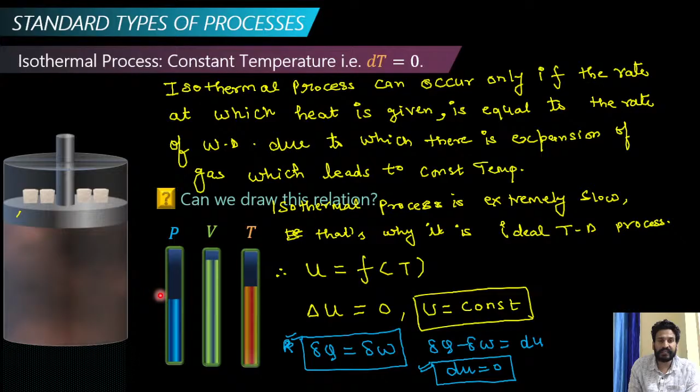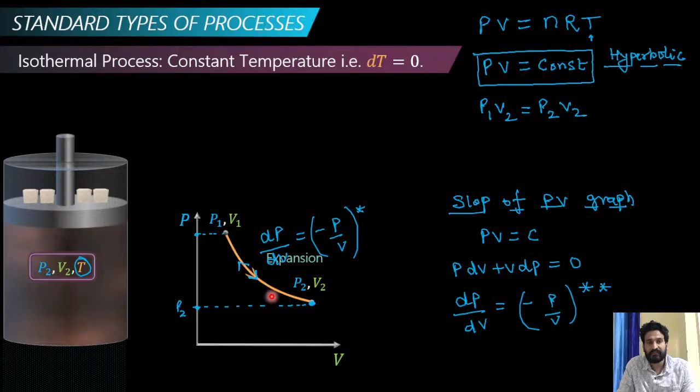So this is what we already discussed, right? After that, we discussed about the slope of the PV diagram. First, we discussed the PV diagram, where P is decreasing and V is increasing. So we discussed what kind of diagram we can expect from this process - a kind of hyperbolic graph we can expect, right? And after that, the very important slope of the PV graph - questions are directly asked on this slope.

So very simple, if you are able to remember this formula, well and good: minus P by V. Otherwise, you know the PV relation for the isothermal process, that is PV is equal to constant, and from that equation you can derive dP by dV by differentiating the whole equation, right? There is no issue. So this is important: PV is equal to constant, or for any two processes we can write P1V1 is equal to P2V2, right? It is P1V1, please correct it - in a hurry we wrote it wrong. It is P1V1 is equal to P2V2, like this. The product of P and V will be the constant.

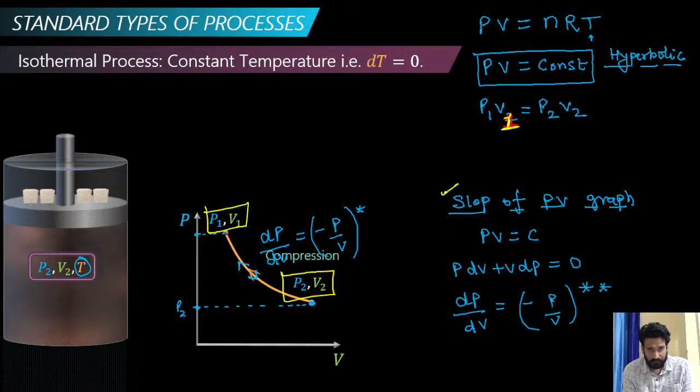Good evening Anushka. So we have discussed the slope of the PV graph. After that we discussed about the work done in the isothermal process. So work done, we derived that W is equal to nRT ln(V2/V1). Good evening Mohammed. So work done, we derived nRT ln(V2/V1), or we can replace this nRT with P1V1, right? P1V1. So it's P1V1 ln(V2/V1).

Please pay attention to my words, what I'm saying, right? Everything we cannot write in the notes - there are certain things which need to be remembered. So here this is the initial condition. If I know the initial condition, or you can say the initial parameters of pressure and volume, and after that if we know the final volume, then we can use this formula to find out the work done for the isothermal process.

If we don't have the value of the pressures, then use this formula. In both the formulas, the volume information should be required. If only temperature is given to you, then use this formula, and if the initial pressure and volume information is given to you, use this formula. If instead of volume, the information is in pressure terms, then use this formula.

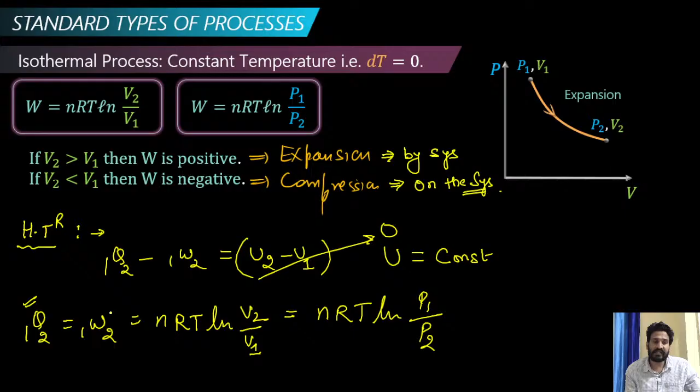If we talk about heat transfer, as we know that the internal energy is not going to change, so these both the terms are equal. So mathematically the heat transfer and work done for the isothermal process is the same. Only by mathematics, not by meaning.

If I plot the PT graph, then this kind of graph I will get, because temperature is going to remain constant throughout the process. In the VT process also, the temperature is going to remain constant throughout the process, right? So this is my PV graph and I am explaining the expansion process. In the expansion process, as you can see with the help of this arrow, pressure is going to decrease. In expansion, volume is going to increase, so here you can see the volume is going to increase and my temperature will be constant throughout the process.

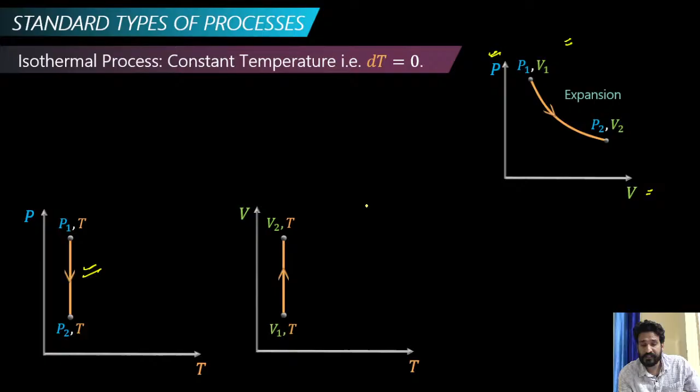I hope that up till this point you have no problem and you are basically done with this. Please give me confirmation. After that I'll start the next part, that is the comparison between the isothermal and adiabatic process. Directly a question is asked on this comparison. Please let me know.

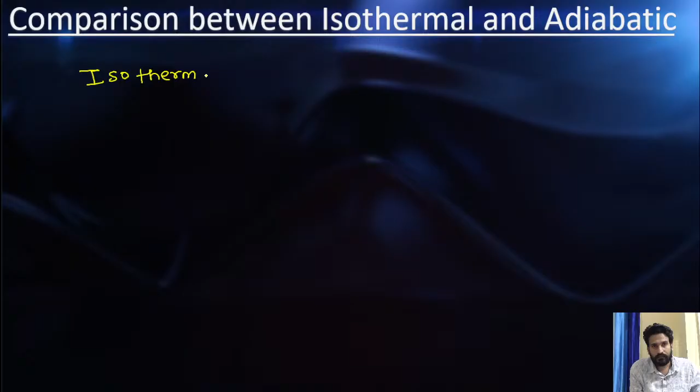So, comparison between the isothermal and adiabatic process. What is basically the comparison? Let's understand this. In the adiabatic and isothermal process, we have discussed one thing, that is the slope of the graph. So let me write the isothermal process on one side and the adiabatic process on the other side.

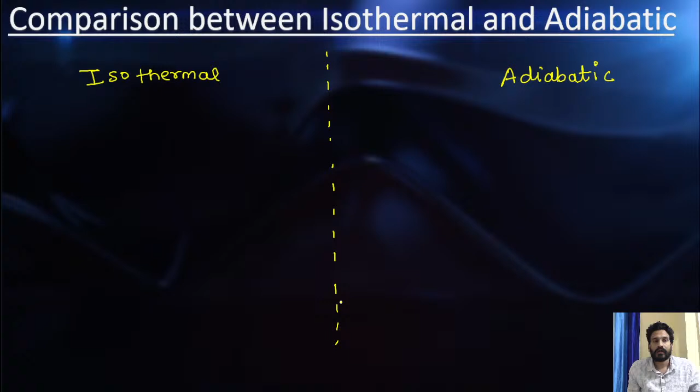First of all, what is the base equation for the isothermal process? That is PV is equal to constant. And this is my PV raised to power gamma is equal to constant. Is it clear to you? That's the first thing.

Secondly, the important parameter to define this difference is the slope of the PV diagram. If I talk about the slope of the PV diagram for the isothermal process, then it is minus P by V, right? And if I talk about the adiabatic process, then the slope will be gamma times minus P by V. Or in other terms, I can write that the slope of the adiabatic process is nothing but gamma times the slope of the isothermal process.

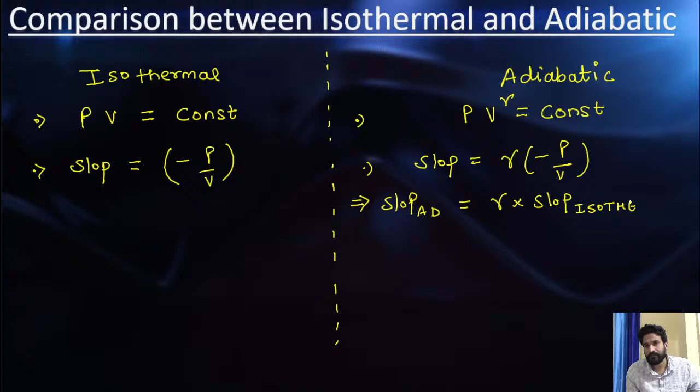What is the meaning? The slope of the adiabatic process is more as compared to the isothermal process. If I give you different PV diagrams for isothermal and adiabatic separately, you will not be able to figure out which graph is isothermal and which is adiabatic, because the pattern of the graph will be more or less the same.

But if I get the graph of isothermal and adiabatic in a single graph, then how can I figure out which graph is for isothermal and which is for adiabatic? This is how, guys, we can figure it out. I think you guys can already figure out how we basically find this graph.

Okay, let's suppose, guys, there is a PV diagram we have. This is my PV diagram. I'm drawing this graph, and meanwhile, please tell me, this is my x-axis, this is my y-axis. Can you tell me which line has zero slope and which line has infinite slope? Meanwhile, I'll try to plot the graph. Please tell me.

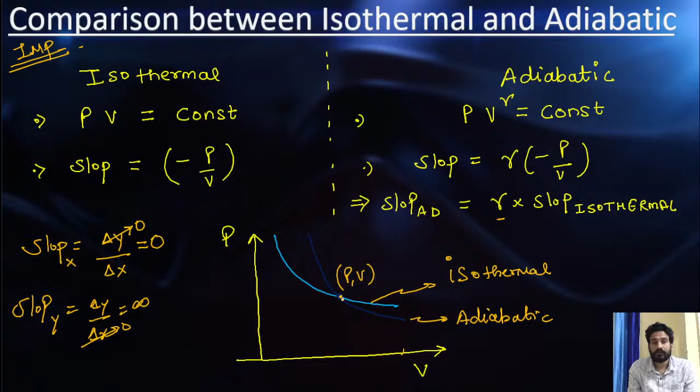If you will allow, then I can move forward. Yes, okay great. Yeah Anushka, is there any problem, beta? Is this clear to you or not? Is this clear to you or not?

Guys, we basically dug down into the deep layer of thermodynamics, right? I discussed each and everything in limited time, covering everything from basic to advanced. We also discussed very good quality questions. If you want to check whether these are good questions or not, compare them to previous year questions — you will find these are previous year questions, but we have solved the very difficult ones. If we solve difficult and conceptual, quality questions, then we can solve the average question in the exam, because there is so much pressure in the examination hall, okay, right?

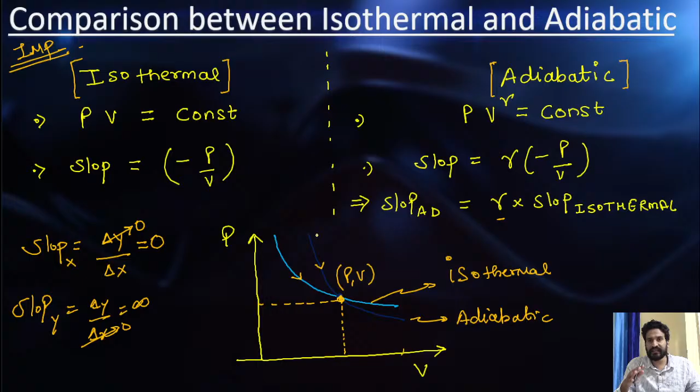Okay, I hope this is clear to you. Now, temperature estimation using the PV isotherm. These are called isotherms, guys, right? Isotherm means these are PV diagrams for the isothermal process. For the adiabatic process, the PV diagram is called adiabat. So this is not a different term.

So with the help of the isotherm, I can estimate which temperature is higher or which temperature is lower. This is what we will try to calculate. First let me plot a diagram, let me plot the isotherm. After that you can plot the diagram, because in between I might make some mistake while drawing.

Okay, so this is my PV diagram. Let's suppose I have isotherms, like this. So these isotherms are at different temperatures. Let's suppose this isotherm is plotted at temperature T1, this at T2, this at T3, and this at T4.

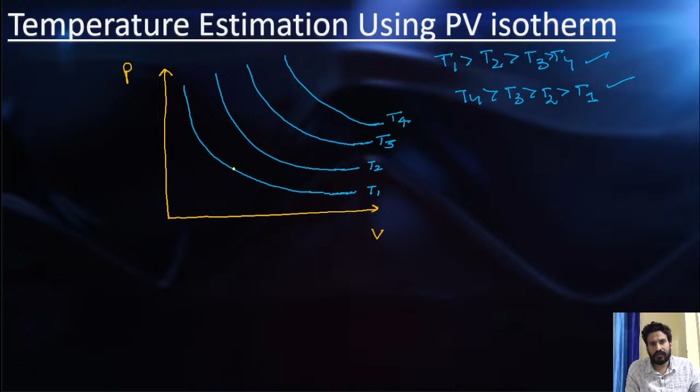So for this, a very simple thought process would be: let's suppose I am going from this point to this point. Let's call this A and this B. What is the PV relation for the isothermal process? It is PV equals nRT, and since T is constant, PV is equal to constant.

So for sure, if my P and V product increases, then my T will increase. I hope mathematically we can say so. If my PV product increases, then T increases. This is for sure. So if I calculate the P at point A and the V at point A, let's suppose this amount of V is V1, and this is P1.

At this point you can see that my volume will increase, but my P will also increase. At this point, volume further increases and pressure also further increases. At point B, volume further increases and P also further increases. It means P4 is the greatest value among all the P values, and V4 is also the greater value. So P4V4 is the maximum value.

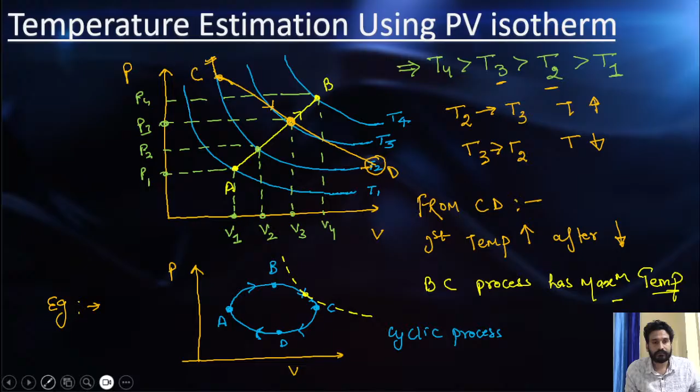Yes, which one? You want me to explain what? This example or this whole thing? You want me to explain this whole thing or this example? Only this example or all? Cyclic process, okay.

It means I should explain the complete concept. See, this is PV, and whatever these diagrams are, these are called isotherms. For the isothermal process, we all know these are the isotherms at different temperatures. Temperature for one isotherm is constant. Suppose this isotherm has T1 temperature, this is T2 temperature, this is T3 temperature, like that.

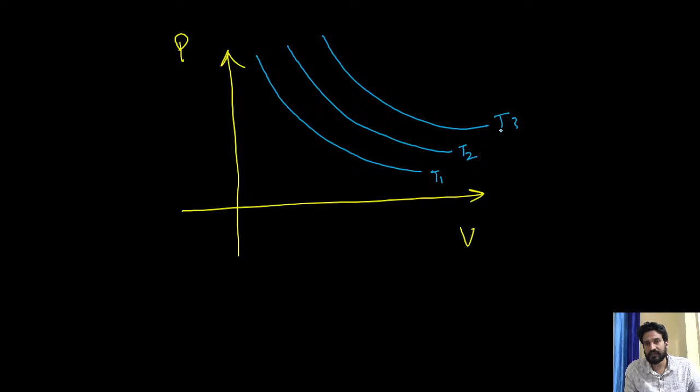At every point on that isotherm, the temperature is T1. Similarly, the temperature at this isotherm will be T2 everywhere.

If I talk about CD, this kind of line was CD. So this is my C point, and this is my D point, and our process is from C to D. This line first touches the T2 isotherm, and we know T3 is greater than T2.

So from C to the middle point, this line first touches the T2 temperature, and after that it touches the T3 temperature. It means the process first has temperature T2, and after that temperature T3. Because T3 is greater than T2, I can say the temperature is increasing.

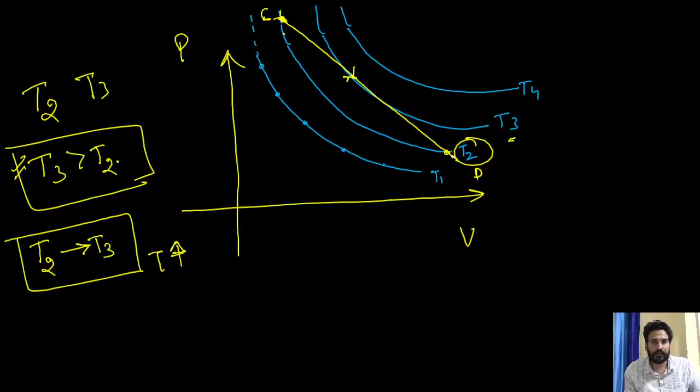After that point, this line touches the T2 isotherm again, so the temperature is going from T3 to T2, meaning temperature will decrease. So from C to D, the temperature profile is: first it increases, and after that it decreases.

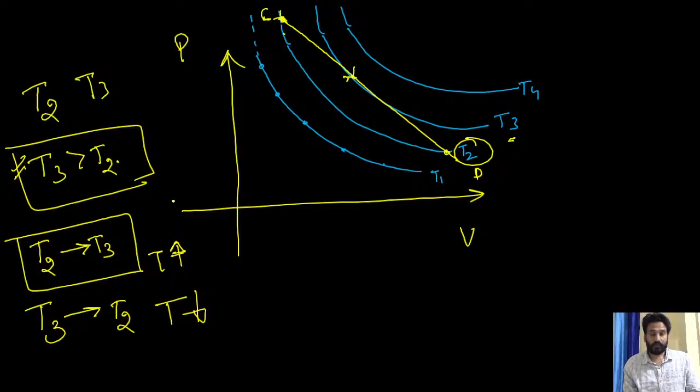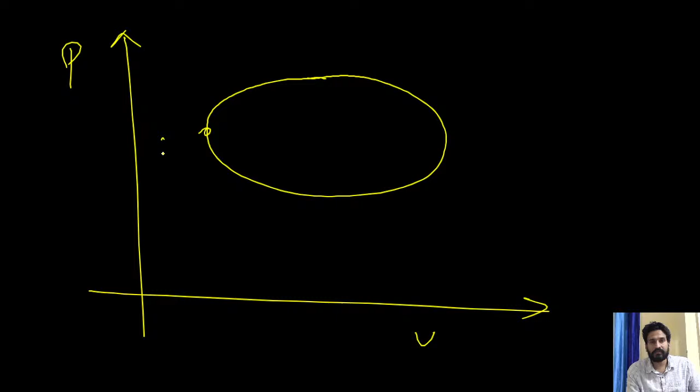Now what about the cyclic process? See, this is the kind of process we have, and this is my A, this is my B, this is my C, and this is my D. I have to tell which process has the higher temperature. So how do we measure this?

We will measure this through the concept we discussed, meaning through the isotherm we will estimate the temperature of the process. This is my PV diagram with a cyclic process, and they will ask which process has the highest temperature, which we estimate through the isotherm.

In the isotherm concept, the simple statement is that the isotherm which is farthest from the origin has a higher temperature, like this one. So we can say directly that this isotherm has the higher temperature.

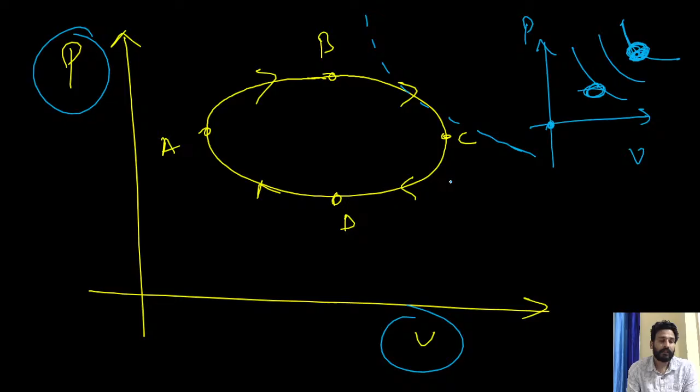Is it clear to you, yes or no? This isotherm has the lowest temperature. In the similar way, the BC process has the higher temperature. If I plot the isotherm, then this kind of isotherm I will get. So this is the extreme, or the farthest from the origin. So this isotherm has the highest temperature.

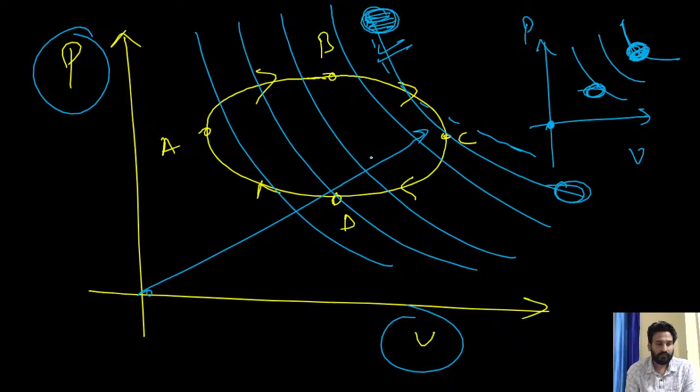Is it clear to you, yes or no? The process which cuts this isotherm has the maximum temperature among all the processes. I hope you got this concept, right?

Okay, now please put the heading isobaric process. So we have discussed the isothermal and adiabatic process, right?

Let's discuss the isobaric process. As its name suggests, isobaric process means the constant pressure process, guys. Yes or no? Is it clear to you?

So let's suppose we have the system, this is my cylinder piston system, and these are the variables P, V and T, right? Let's give heat to this system and let's see how this system will behave. Let's try to understand it.

As you can see, Q amount of heat I give to this system, and the piston will move in the forward, or upward direction, meaning work is basically done by the system. Work is done by the system. Is it clear to you?

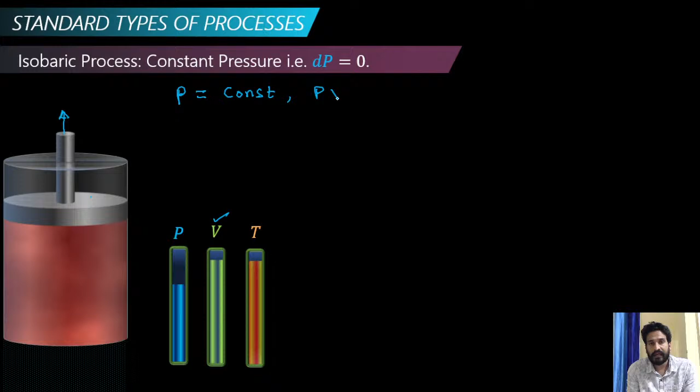So guys, if pressure is constant, then if I write PV equals nRT, and pressure is constant, can I say that V divided by T equals nR by P? nR itself is constant, P is also constant. It means I can say that V by T is my constant. V by T is my constant, yes or no? Or I can say that V is directly proportional to T.

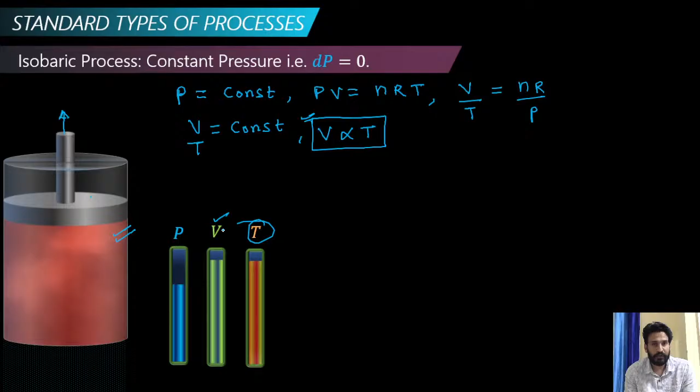So as we know, in the expansion process, my volume will increase. If my volume will increase, then temperature will also increase, right? So let's see this animation again. Expansion will happen. Volume and temperature basically increase by the same amount, because V is directly proportional to T. I hope this is clear to you.

Okay, so let's try to draw this, guys. Let me check this slide. Okay, so let's try to draw this, guys. So, PV diagram - what kind of PV diagram can we get, guys?

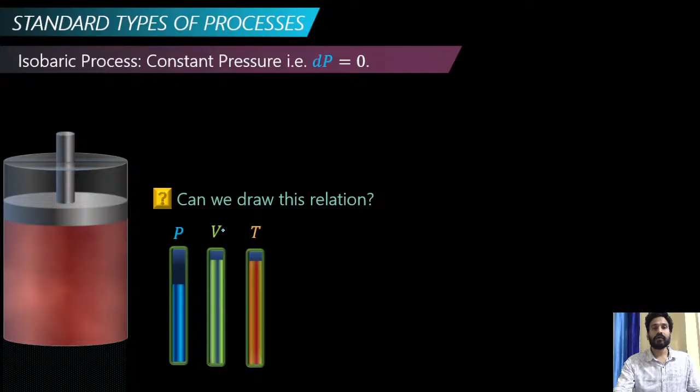After writing this, put the heading graphs. Put the heading graphs, in which first we discuss the PV graph. First we discuss the PV graph.

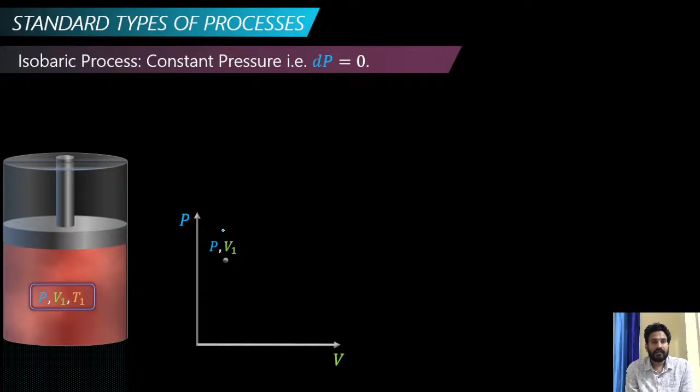So, very simple. For the expansion case, we know that pressure is basically constant, right? And volume will increase. So this is any state having the parameters P, V1 and T1, and after expansion my pressure will basically be constant. So we can see the straight line, horizontal line, and my volume basically increases. This is my PV diagram, right? This is my expansion.

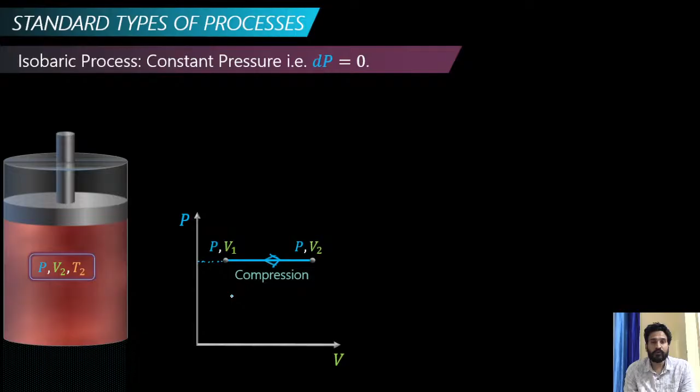And for the compression, it is the same, that pressure is P, volume is V2, right? And it is going from volume V2 to volume V1, right? So the arrow will be like this. That's it, nothing else, right? Is it clear to you? So this is my PV diagram.

Now we'll try to find out the work done, because we have the PV diagram now. Through the PV diagram we can easily understand the work done. After that we will plot the VT and PT graph also.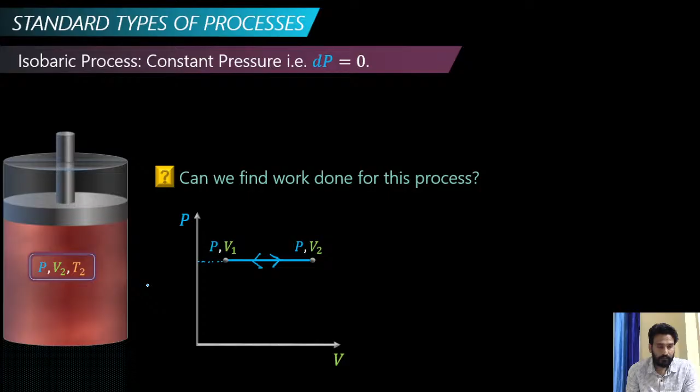So what is the work done formula, guys? It is W equals integration from V1 to V2 of PdV. This is the process itself. I think it is clear to you? This is the formula only. We have discussed it multiple times. Is it clear to you or not?

So W equals integration of PdV from V1 to V2. I can write it as P times final volume V2 minus initial volume V1. So it is P times V2 minus V1. Is it clear to you or not?

Can I write this P times V2 minus V1, or you can say P delta V? Can I write this P delta V is equal to NR delta T?

Because in the isobaric process pressure is constant, and NR is also constant. If there is a change in the volume, you can see the change in the temperature. So P delta V is equal to NR delta T. With the help of this equation, I can write P times V2 minus V1 is nothing but NR times T2 minus T1. Correct? Yes or no?

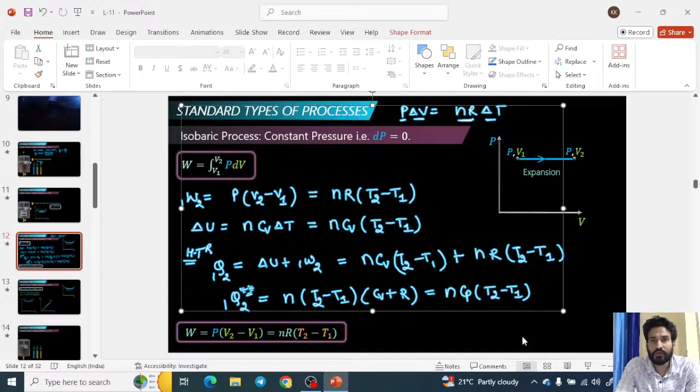So, very important formula for the isobaric process. Heat transfer in the isobaric process is NCP delta T. Internal energy is always NCV delta T, but heat transfer is not always NCP delta T. I hope that I am clear with this. Always remember this, most of the students get confused in this.

So please guys, you can make a note of it, that delta U is always NCV delta T, because it comes from Joule's law. But heat transfer is not always NCP delta T, because in the adiabatic process it is 0, and in different processes Q will be different. So please note down this, and after that we will discuss the further things. My work done formula is P times V2 minus V1, or you can say NR times T2 minus T1. These are the important formulas for the isobaric process.

Please tell me, what's your doubt, Muhammad? What is your doubt? Please tell me. Anushka, do you have any doubt? Do you have any doubt, beta?

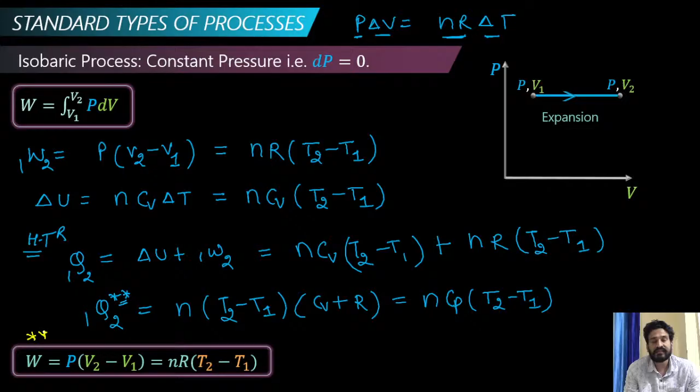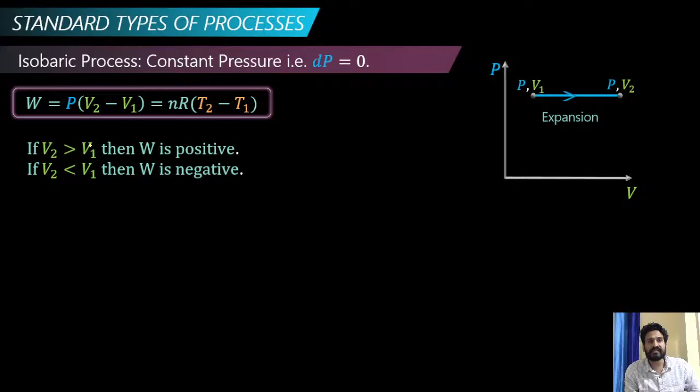So as we know that W equals P times V2 minus V1. If V2 is greater than V1, it means this is the expansion process, so work done is positive, which means work is done by the system. And if V2 is less than V1 in the case of compression, then work is done on the system.

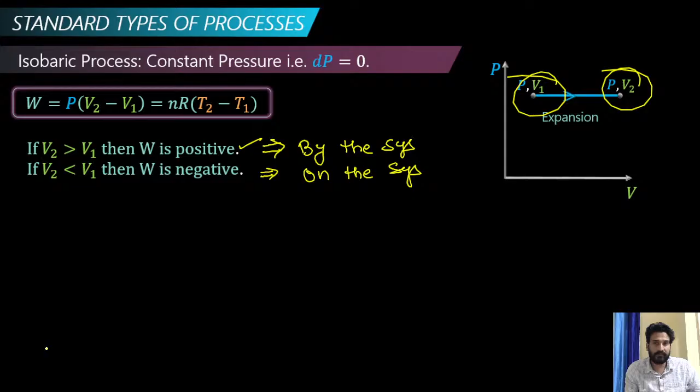Now, again in the graph, we will try to plot P and T, and V and T. So think about what kind of P-T trend and V-T trend will look like. Please ask if you have any doubt, don't hesitate. And meanwhile, Anushka, just plot the graph P and T and V and T, and after that match your graph with my graphs.

In the GATE examination, if your main motto is just to qualify, then you can remember the formula, solve multiple questions, and you will qualify. But if your target is to get a 2-digit rank, then without derivation it is not possible. Derivations are very important because through derivation the concept building process happens. Without derivation you cannot understand the concept thoroughly. GATE is conducted by the IITs, and they are famous for concepts, so this exam is not about mugging up formulas and solving 100-150 questions. You should be very clear about the concepts, and that is only possible through derivation.

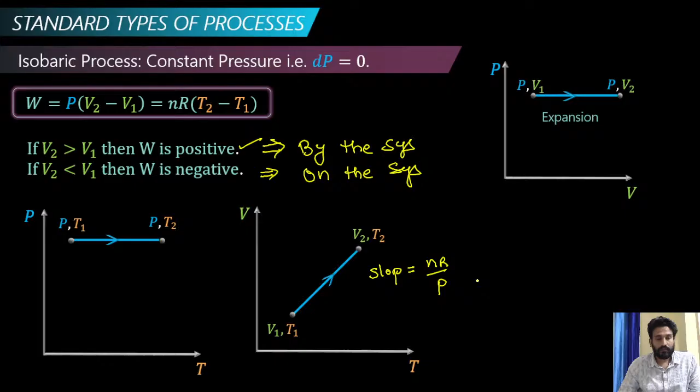So this is all about the isobaric process. Each and everything is important in the isobaric process.

Please write down the next process, the isochoric process. We have discussed adiabatic, isobaric, and isothermal. Now we will discuss isochoric. Isochoric process means constant volume process, so change in volume will be zero.

The volume throughout will remain the same. This is my initial value of the volume. After giving heat, the value of my volume will be same. So what changes? Slowly my pressure will start to build up, because you are giving heat to the system.

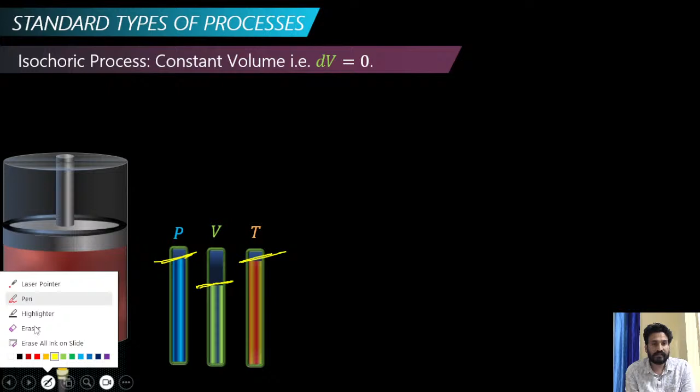If you are giving heat to the system, then my molecules get energy, and they will strike the wall of the cylinder with a very high velocity, right? So in this scenario, my temperature will increase and my pressure will increase. This kind of process comes into the category of isochoric.

So here you can clearly see that there is no change in the volume, right? So let's try to find out the PV diagram of it.

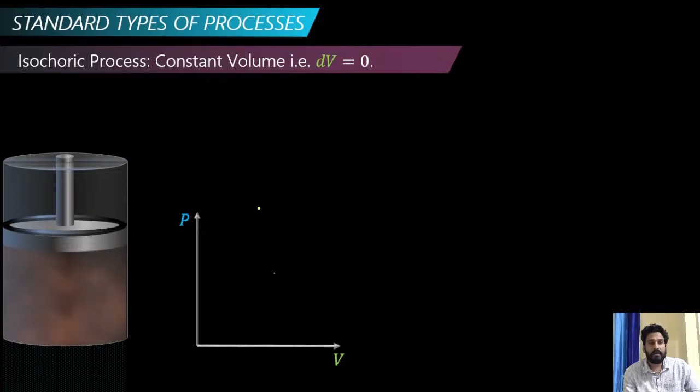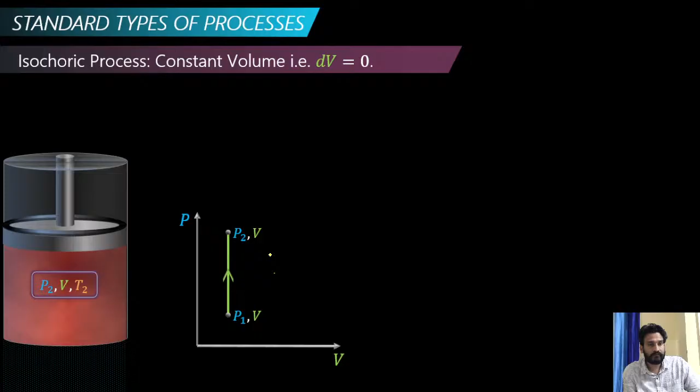So how to plot the PV diagram? Pressure is going to be changing, volume is constant. So by giving heat, pressure will increase. So the graph will look like this, from P1V to P2V. So can we calculate the work done for the isochoric process through the PV diagram?

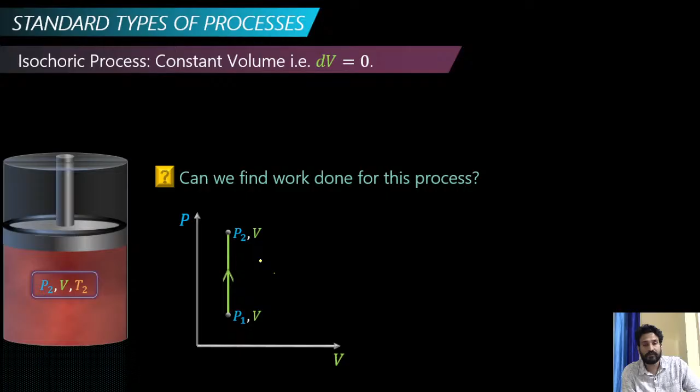Yes, we can calculate this work done. How do we calculate it, guys? As we know, this is the work done formula. My work done is equal to the integration from V1 to V2 of PdV.

So if I write the formula, then W is equal to P times V2 minus V1, and as we can see, V1 and V2 values are the same. This is V itself. So this difference is 0.

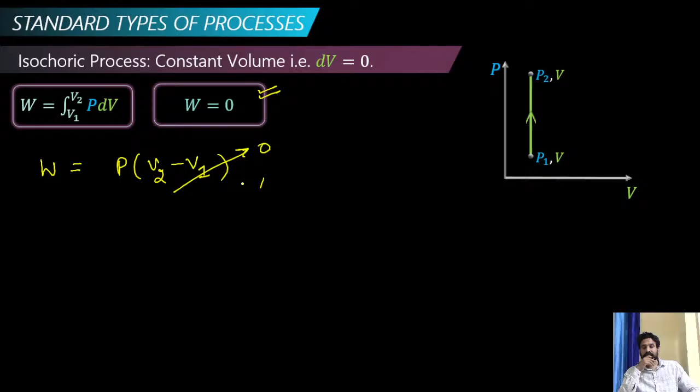So in the isochoric process, what is the work done? Work done will be 0. In the isochoric process, work done is 0.

Okay, let's plot the next graph: P-T and V-T. Let's find out the PT graph and VT graph.

Again, pressure is going to increase and temperature is also going to increase. So what kind of graph will you get? A straight line graph. These are very simple things.

If you have any doubt, you can ask, guys. And what is my slope? It is nR divided by V. What is my VT graph? Temperature will increase and the volume is constant. So this kind of graph we will get as a VT graph.

Okay, what about the heat transfer? Can anybody tell me? If I write the first law of thermodynamics, then can I say that the heat transfer from 1 to 2 is equal to the change in internal energy, guys, plus work done from 1 to 2.

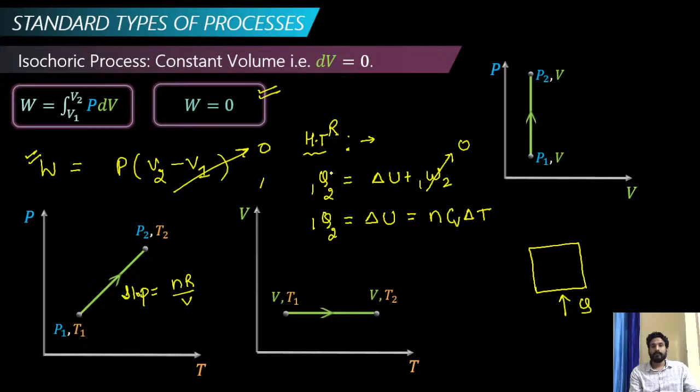So this is the work done, this is the heat transfer, this is the internal energy, and these are the graphs. It's done, guys. Please let me know if you have any problem.

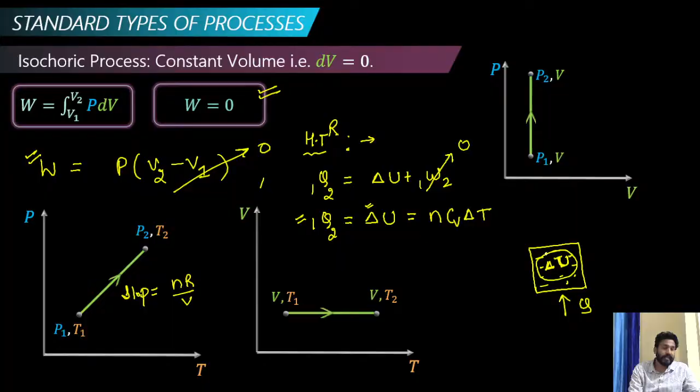So let's solve a question. We have discussed so many concepts, right? Now it's turn to calculate questions based on that. After these questions, we can say that our concepts are good.

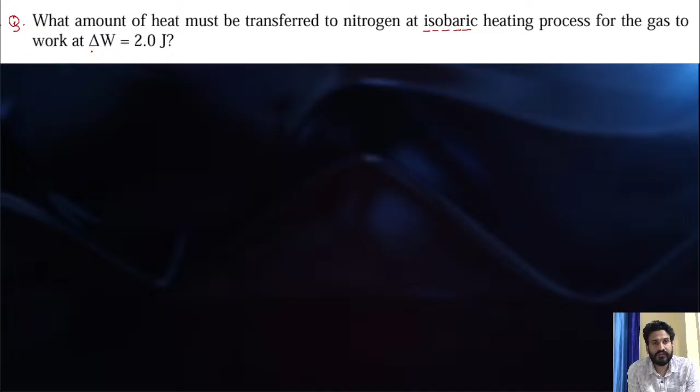So the question is saying: what amount of heat must be transferred to the nitrogen at isobaric heating process? So in this question, the process is isobaric, and we have to calculate the amount of heat transferred, and the work done value is given to us. So what is the formula for heat transfer? What is the value of heat transfer in case of isobaric? Can anybody tell me, guys?

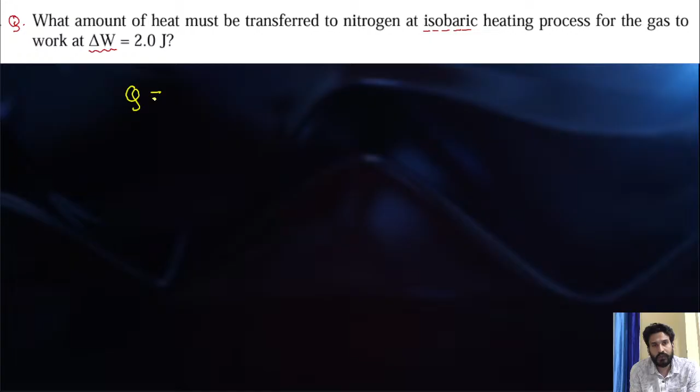We already calculated that Q is equal to nCp delta T. I know the formula, but do I know delta T? Do I know Cp? No, I don't know the Cp, I don't know the delta T. How can I calculate my heat? Is it clear to you? So how can we calculate this heat, guys? What is the work done for the isobaric process?

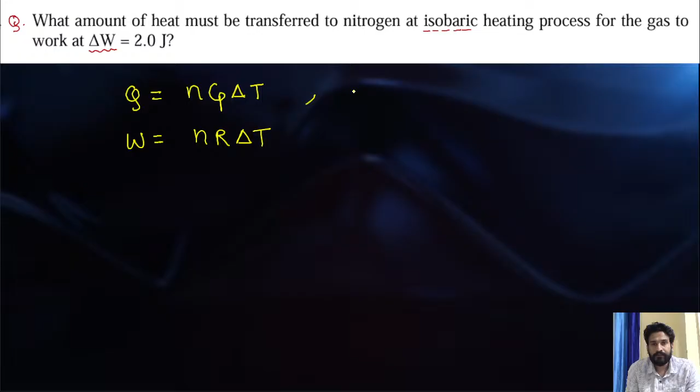It is my nR delta T. What is the first law? From Q12 minus the work done is equal to change in internal energy. It is clear to you, right? So if I have to calculate Q, we should have the value of delta U and the value of delta W. I have the value of W, but I don't have the value of delta U. So how can we calculate this question now?

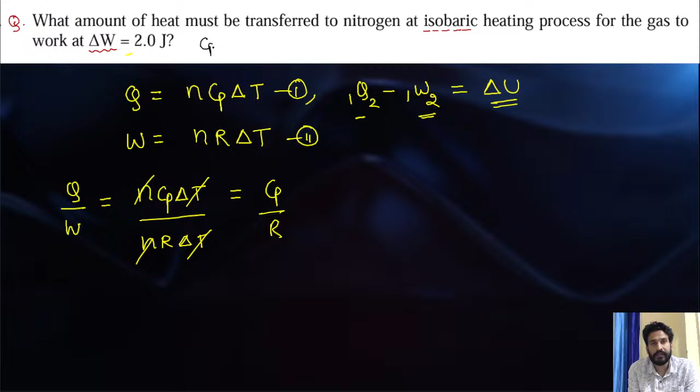n delta T gets cancelled and it is my Cp divided by R, right? Most of the time you will have the value of Cp for the particular gas. Cp for nitrogen is 7R by 2. This value is basically not given in the question, but still you should remember as an engineer what is the value of Cp for nitrogen at least. If I put the value of Cp here, then Cp is nothing but 7R by 2.

And it is my R, R gets cancelled. I have to calculate Q. Q is equal to 7 by 2 multiplied by W, and W is 2, so 2 gets cancelled. The unit is joule. So what is my Q? My Q is equal to 7 joule here. Sorry, 2 joule got cancelled already.

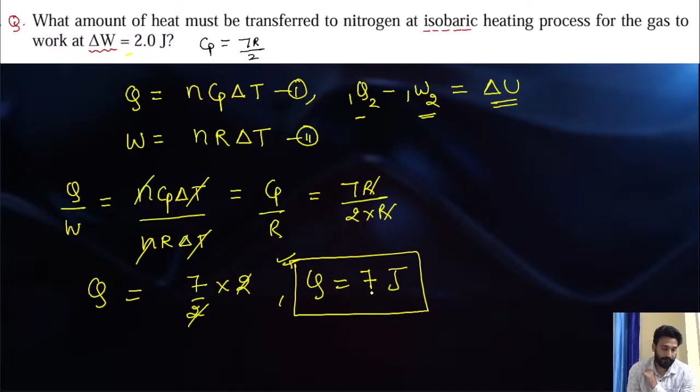Question is: 1 mole of an ideal gas was heated isobarically, delta T is equal to 72 Kelvin. So the process is isobaric, change in temperature is 72 Kelvin. It obtains an amount of heat, 1.6 kilojoule. Find the increase in its internal energy and the magnitude of gamma, that is Cp by Cv.

Okay, how to calculate? Just give me a thought only, I'll solve for you. How can we calculate this question. So these are the informations: number of moles is 1 mole, change in temperature is 72 Kelvin.

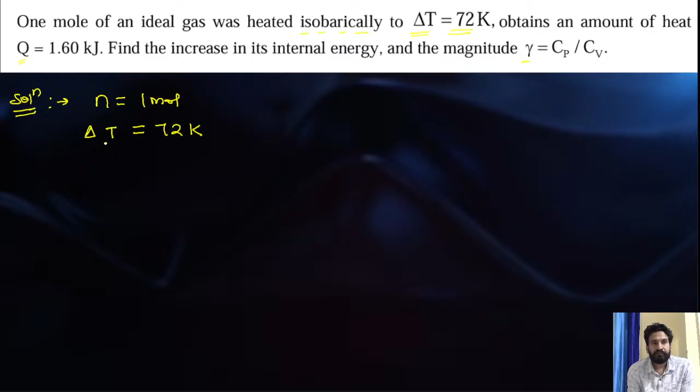Remember this, and the process is isobaric. The heat exchange is 1.6 kilojoule and the process is isobaric. So whether the change in temperature is in degree Celsius or in Kelvin, there is no problem, right?

So I have to calculate its internal energy. I have the value of Q. If I have the value of W, then I think I can get the value of internal energy, right? It's clear, because with the help of the first law of thermodynamics, you can calculate this value directly. What is the first law of thermodynamics? Q minus W is equal to change in internal energy, right or not?

Increase in internal energy means we are interested to calculate the change in internal energy. We have Q, yes, we don't have W, so let's try to find out W. W is equal to, for the isobaric process, nR delta T. I have n equal to 1, I have R equal to 8.314 joule per mole per Kelvin, multiplied by change in temperature 72. This is the value of W, guys. And this value, if I write it, is 0.6 kilojoule.

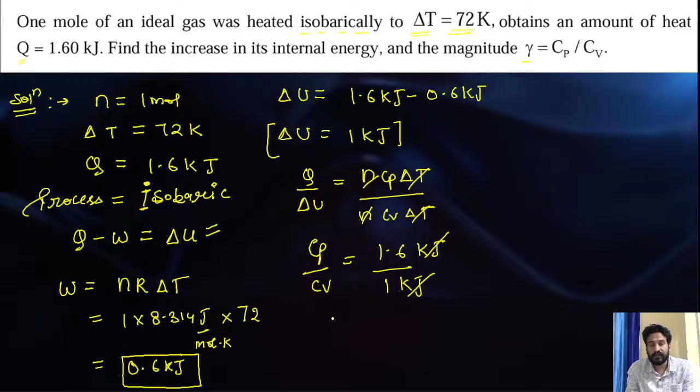So Cp by Cv is equal to Q divided by delta U. I know Q, that is my 1.6 kilojoule, divided by delta U, which is 1 kilojoule. Kilojoule gets cancelled. What is this ratio, guys? This ratio is 1.6. So this is my right answer.

Please tell me that this thing is clear to you. But again, I'm saying, if you will basically commit a mistake here, please note this down.

Q is equal to NCp delta T is only for isobaric process. I know that you will forget this part, that's why I make this note. Because it is an isobaric process, I'm able to write this. Otherwise, I am not able to write Q is equal to NCp delta T.

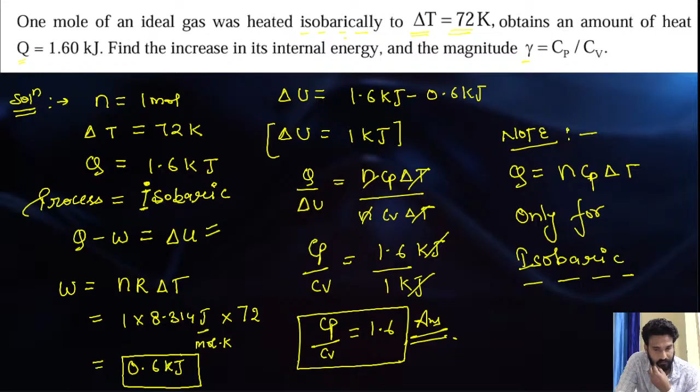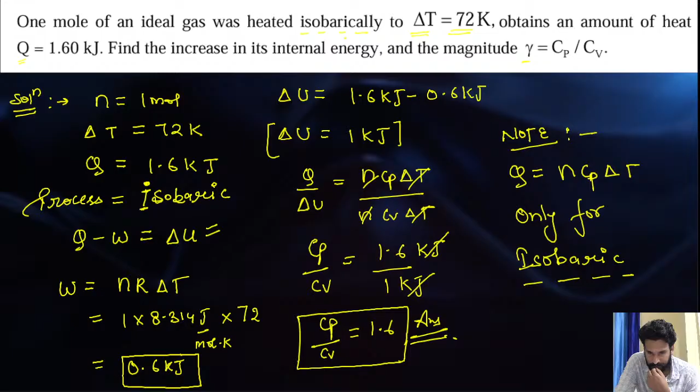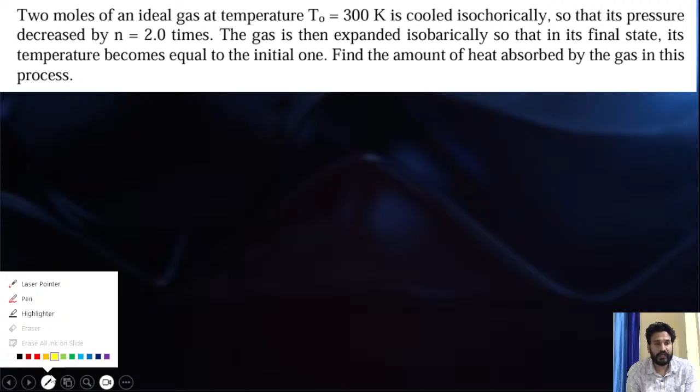Okay, please read this question. A very good question. If you are clear with each and everything, then only you can solve this question. Otherwise, you cannot solve this question. So please read this question.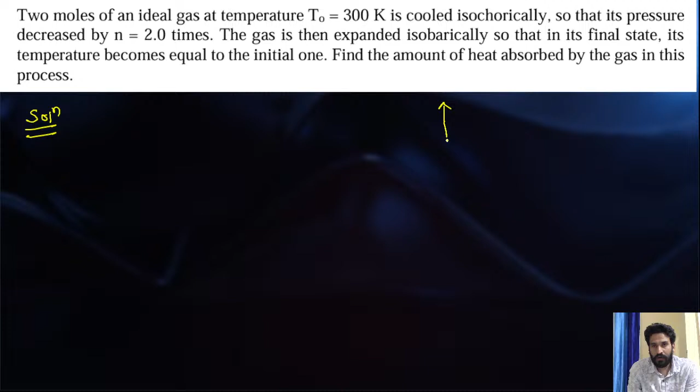Okay, so please pay attention here, guys. Very good question. See, this question has a solution of only 3 lines, but you can solve this question only if you have that much clarity about the concept. So that's why I always say, please guys, revise all the concepts if you want to achieve something. Otherwise you cannot achieve anything.

So we will solve this question with the help of a PV graph. What is this process? There is a discussion of volume and pressure, that's why I plot the PV diagram.

Question is saying 2 moles of ideal gas, please pay attention here guys. N is equal to 2 moles, and the initial temperature is 300 Kelvin. So let's suppose the process is here, and here my temperature is 300 Kelvin.

It is cooled isochorically. It means cooled isochorically means that temperature will decrease and volume will be constant. So if volume will be constant, then I have to go like this, yes or no? You can say in this line my volume will be constant. Is it clear to you or not?

PV is equal to nRT. Isochorically means volume is constant and nR is also constant. So for isochoric process, my P is directly proportional to T. There may be a doubt that, sir, if you move in the downward direction by keeping volume constant, if I go in the upward direction, then also volume will be constant. Then why will I go in the downward direction? That's why I explain this. So P is directly proportional to T, and in the question it is given that it is cooled.

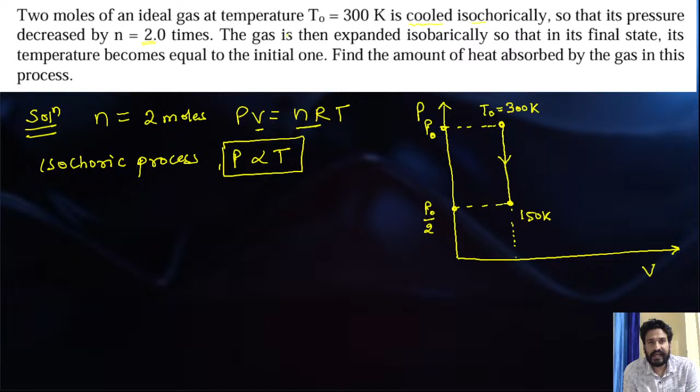Again, the gas is then expanded isobarically. Gas will expand, it means volume will increase, and it is isobaric, it means pressure will be constant. So it means I should move in this direction.

So as you can see, there is expansion, volume will increase and pressure will be constant - isobaric. So in its final state, you have to expand this gas till the temperature becomes equal to its initial temperature. So here, what is the temperature? It's equal to its initial temperature, 300 Kelvin. Let's suppose this is point A, this is point B, and this is point C.

The question is, find the amount of heat absorbed by the gas in this process. What is the process A to B and B to C? In the whole process, I have to calculate what amount of heat is basically absorbed by the gas. How to calculate?

Apply the first law of thermodynamics. My first law of thermodynamics says that the heat transfer in the process - let's suppose my process is ABC - is equal to nothing but the change in internal energy in the process ABC, plus the work done in ABC. I have to calculate the Q amount. Is it clear to you?

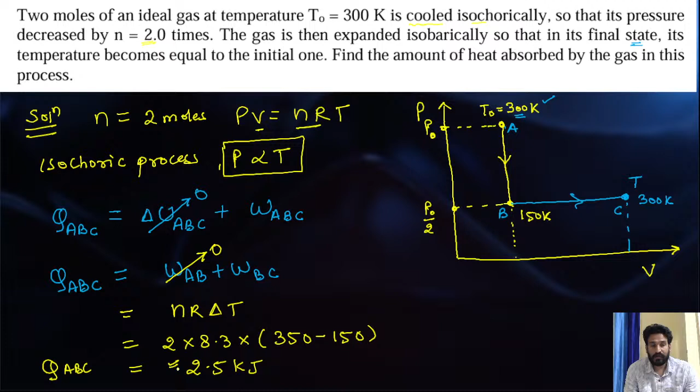Actually, there's a function nearby my quarter, so there can be a lot of noise outside if we schedule this class in the evening slot. So I will try to schedule this class in the afternoon, so that we can do our class without any disturbance. Because if the function happens, there may be a lot of disturbances and we cannot do the proper class. So I will try to schedule this class in the afternoon - be prepared for that.